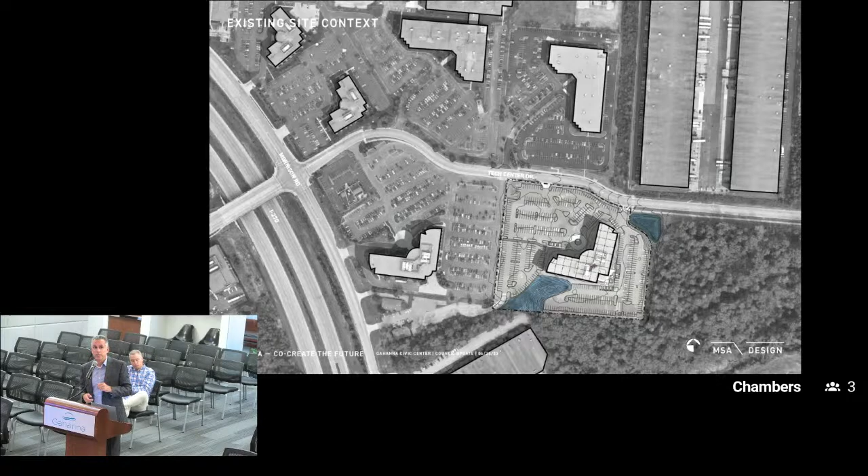So as we started looking at a new site plan, we began with the building and getting back to this rebranding idea of a unique identity. From a cost-effective perspective, we saw that if we focused our efforts on the northwest-facing part of the building, that would solve a lot of issues we saw with the existing building at the time.

All the light gray areas you'll see on the floor plans are the additions to the building. The unique circumstance is they all required a higher ceiling level, a higher floor-to-floor than the existing building provided. The existing building has 14-foot floor-to-floor plates throughout. So to put a council chambers in a 14-foot floor-to-floor, we'd get close to a 9-foot ceiling, and that's not an appropriate environment for council chambers.

Same with the Sally Port—it requires a high bay space for storage and taller vehicles. The Sally Port is where police officers bring their cars in and unload prisoners.

The two existing curb cuts remain, and we added another one here. Secured parking for police is on this side, which primarily occupies this side of the building. This was intentional, so if they got a call, they could run out, get in their vehicles, and shoot straight out to the street—just to make things easy on them from a timing perspective.

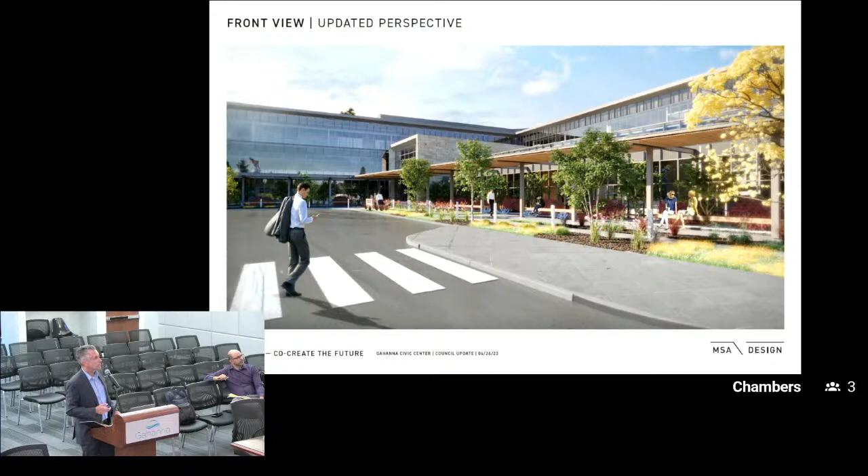And then just another perspective looking from another direction. As I mentioned, over here is the entrance to the senior center. And then we do have this canopy that sort of runs all the way through, and then that's the main entrance. And that's it.

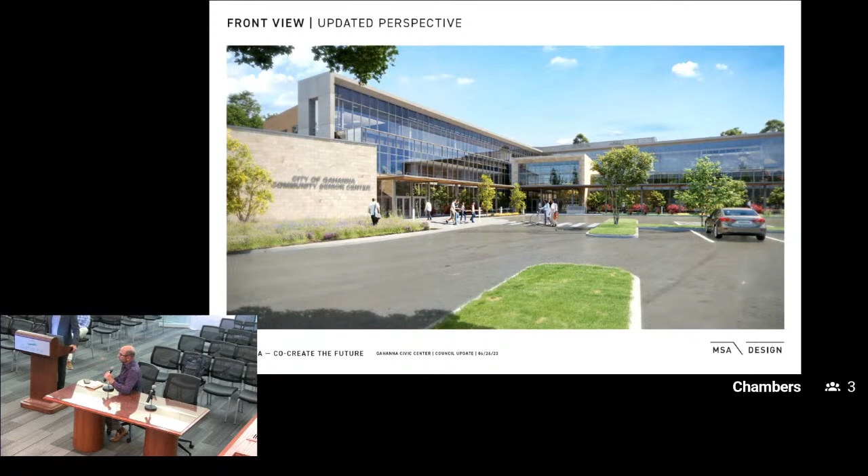It was very important to us. We had the conversation following the brownfield discussion that was had in these chambers just a few months ago, or I guess a year ago at this point. But this is the people's building, this is City Hall, so it's important for us to have the public discussion and have your input on this. As I started with, you're the experts, you hear this all the time, and we want to hear your input and create the opportunity for the public to be part of the process.

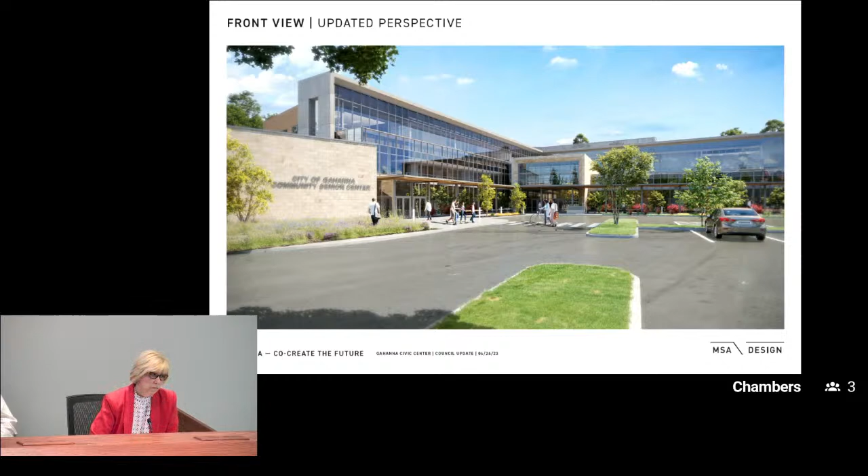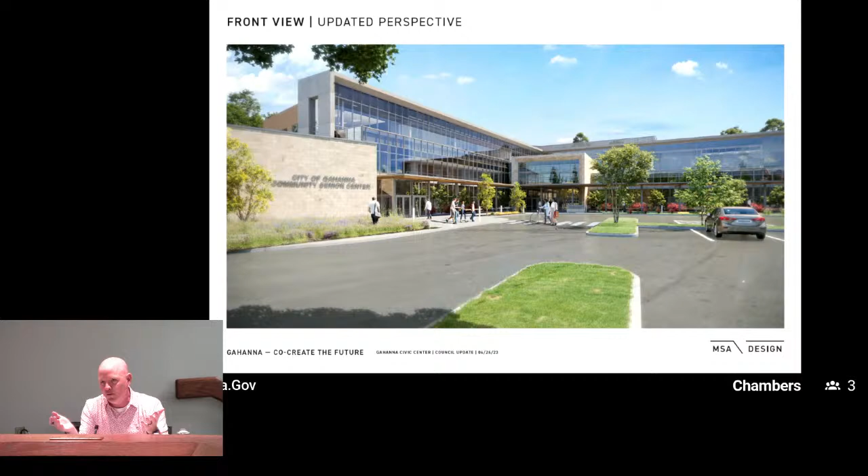Any ideas at this point on variances? I think the one that jumps out is probably parking. I don't think you'll have any pushback — the commission's been very open to that argument for commercial buildings. The reason I ask is just so you can gauge the temperature of the planning commission, and we're not surprised if you come with 20 variances with the application. To speak on their behalf, they've been very open that you guys are going to be engaged in this process along the way. It's always been on the table. That's why I was like, well, what are you talking about?

I didn't know about the brownfield thing. It's always been presented to me that this is part of the approval process and getting through the city. And that's refreshing, like the mayor said, to have public input and to go through the steps that all other developments do. Our firm in general takes on an attitude that this is the community's building — we're here to help execute it. That's always been entrenched in the values of our firm, so just so you know that. And I think the process speaks to that too. Thank you. Thank you.

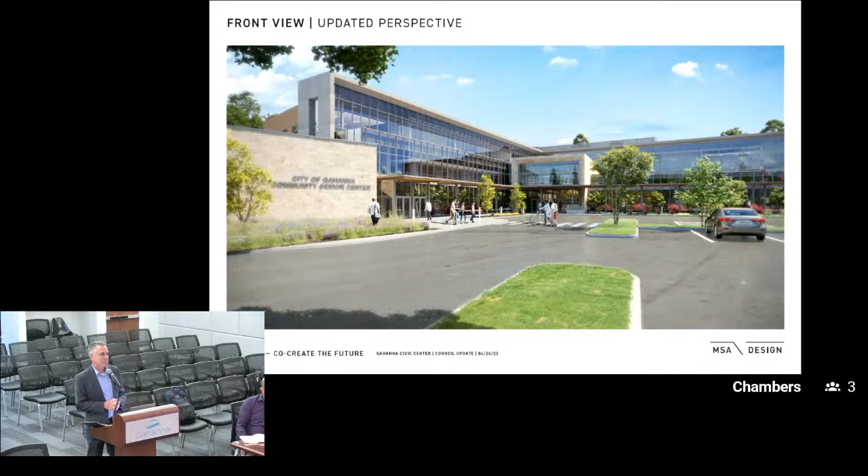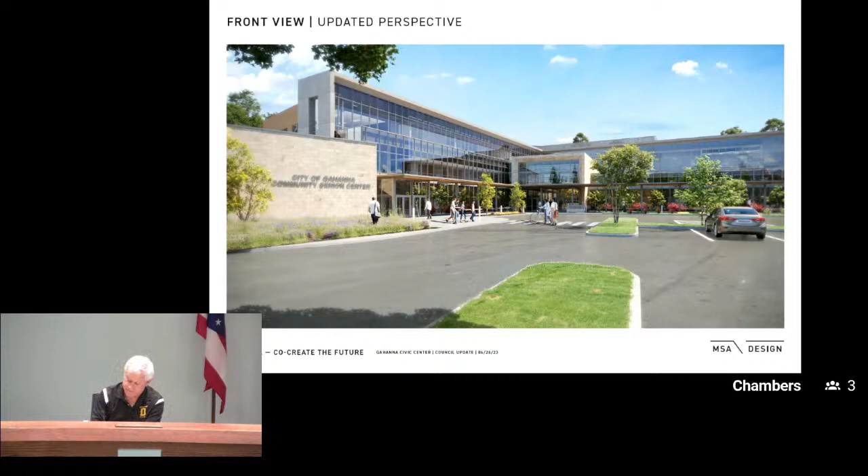Any other questions from the commission? Mr. Markin? So I just pulled up Google Earth real quick — one of the things that seems to come up all the time is sidewalks. It looks like there's a sidewalk and a walking path on the east side of the street, it comes up the west side, and right before your building there's a crossover to Cross Tech Center, then it crosses to the other side.

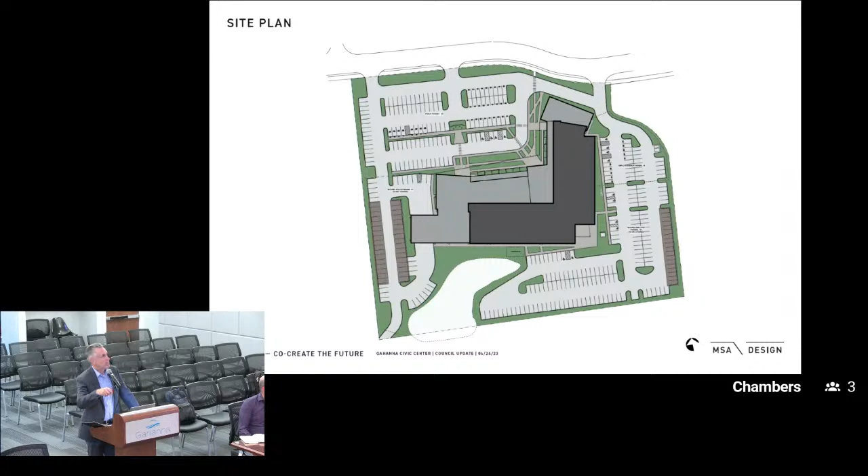I don't know if this is for Michael — we noticed that right away. And I didn't point it out when I walked through here, but if there's a bike path coming down, you've got to go across the street, it goes around, then comes around like this. We think that was originally done that way because there's a bus stop on the other side of the street. But one of the things we worked with the city on very early was, that's fine, leave it crossing, but we need to figure out a way to get this bike path continuous through here, because this building is a hub for the community.

It can be a trailhead basically for that bike path. So we envision 5K races that might be organized — you use the lobby as where you come in and sign up, maybe open up the bathrooms for the runners to use, and everything comes out of there. So that was a critical piece we worked in right away, was to pull that bike path over to the other side, which will be twofold — used as a sidewalk, a walking path, as well as the paved trail. I think, agreeing with you, that's important — it's something we try not to bend on, getting sidewalks and bike paths wherever we can have them. I'm a cyclist, and bike paths are important.

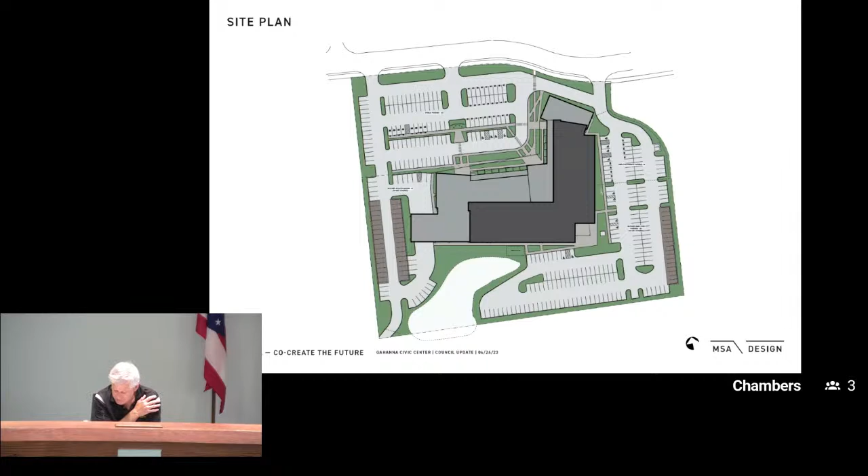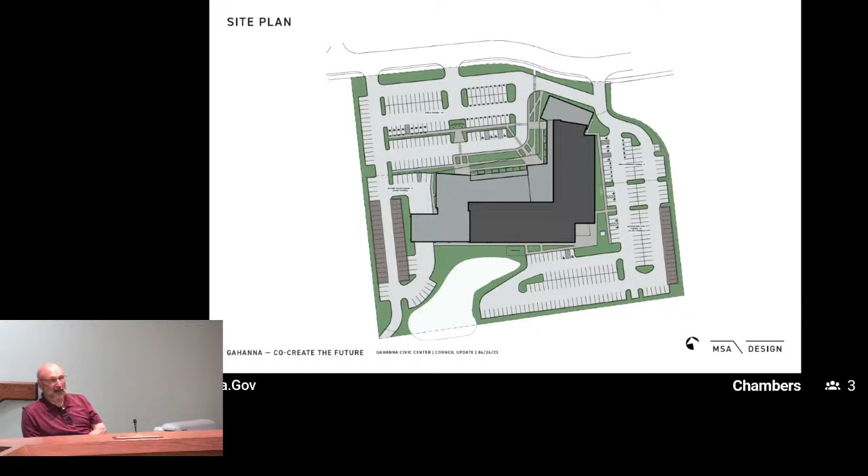That's all I got, Mr. Mako. Mr. Greenberg? I'm just curious, and I've had some discussions about environmental aspects to the property. Has anything been looked at or finalized as far as that goes?

Environmental, such as how the building operates, or sustainability, you mean? I think of environmental, I think of asbestos, so that's why I ask. No asbestos? Yes, that's a conversation that comes up continuously throughout the process.

We are in an existing building with limited funds, but we are doing best practice where it makes sense. You heard me mention the idea of solar arrays on top of the covered parking. We will have EV charging stations out in the front parking lot, and the roof of the existing building will be structurally upgraded, because it has to be already since this is an essential facility from a design perspective.

It will be upgraded to the point that it can handle the additional load of any future solar arrays, and we'll put conduits in from wherever they need to go to get to the roof. So we are equipping, where it makes sense, bringing that into play. And all our mechanical systems going into the building will be high efficiency, for the best use for the building too.

As part of the process, the question came up the other night about daylighting and the use of daylighting. On the front of the building, there's a lot of light that spills into that area. That lobby during the day is probably not going to need a lot of light itself—it's going to be lit primarily through daylighting.

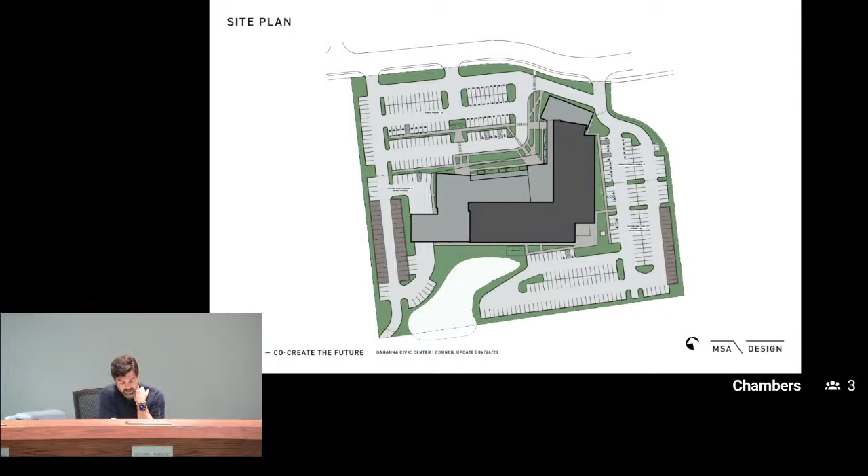The amount of glass - without seeing the renderings for the first time, it's hard to gauge what's in plane, what's out of plane, and things like that. But I think the amount of glazing on that north side is actually going to be really beneficial, especially for the public spaces. Being more north facing, it should be pretty diffuse for the most part, and I think that's good too.

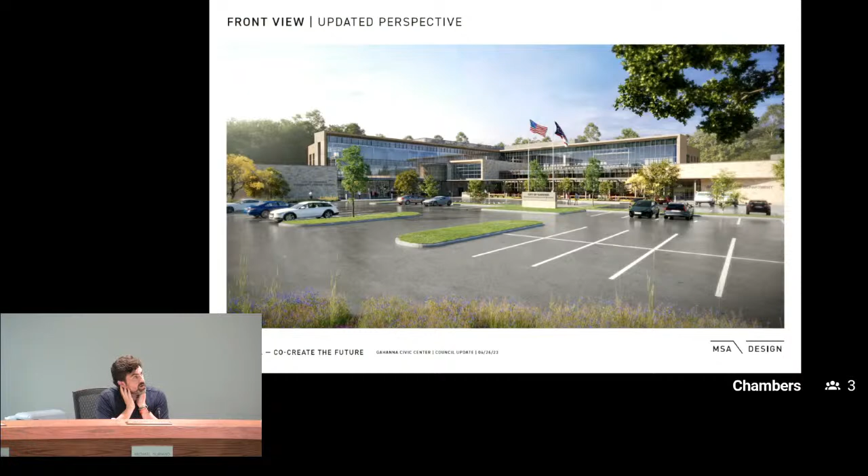I did have one question with regard to daylighting, and that is, because a lot of the staff spaces and a lot of the interior spaces towards, I guess, the south and the east - I'm not sure what the windows look like on the back of that building - but when I look at this building and go upstairs or on the first floor, one thing I'm critical of as an architect is that this feels like a really hermetically sealed box in terms of natural light, like what we see in workplace design, where it just feels really dark. So is there opportunity for, whether it's borrowed light or direct glazing, on the south and east?

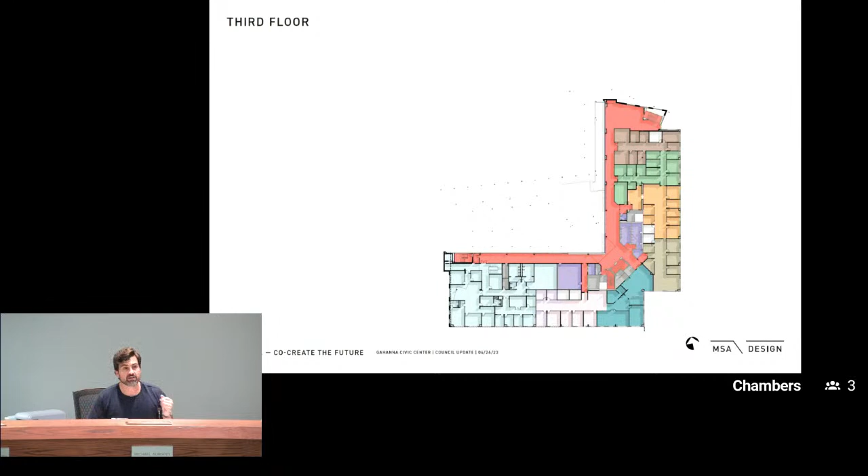What we really focused on, as you picked up on, for all intents and purposes - I'm on the third floor because this is the best one to explain with - this whole wall has been transformed into complete curtain wall, so it's all glass. So this whole red area will take on a lot of natural light. As you get into these office spaces at the entryways, those will not be solid doors - those will be glass doors with glass side lights, even on the outside walls where we have offices all lined up, so light will come in from the windows we currently have and spill into these centralized areas. Is it where we would like it to be? Probably not, but we are also dealing with existing construction and limitations with budget. So the idea is really focusing our efforts on this front facade and putting everything into that, and essentially not touching the back of the building.

We're going to recap the parking lot. We'll redo some landscaping back there, but it's really some nip and tuck, just kind of spruce it up a little bit. That's just where we are. We can't just drop the entire facade and put a whole new facade on the building.

Sure, no, I definitely understand. I just didn't know what types of windows we had on the backside. They're like punched openings, probably at least 5 foot by 5 foot. So there's some pretty decent light that comes in there. But how does that really transfer itself from here and get into here?

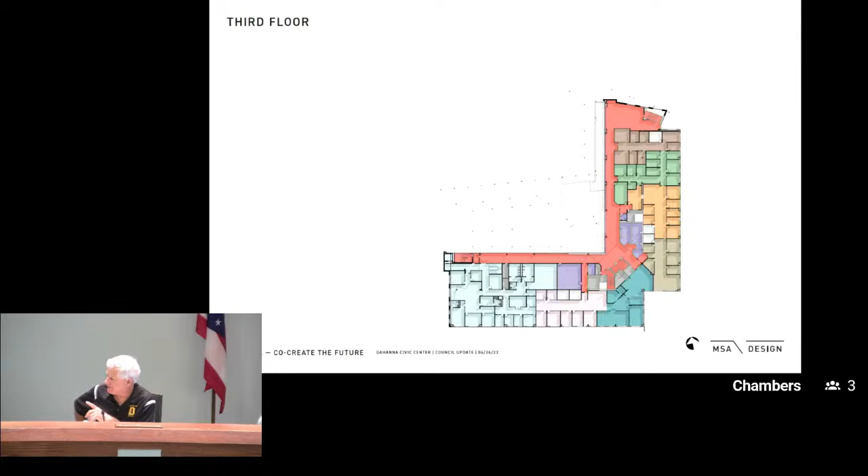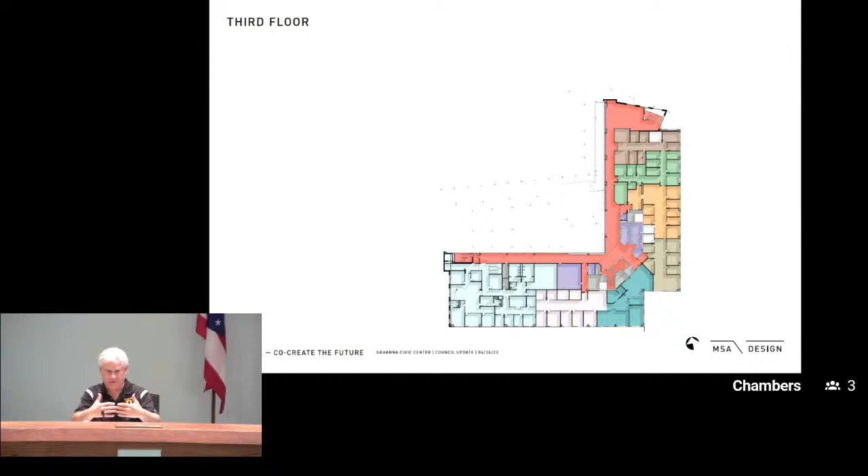Got it. Okay, can I ask you a quick question on that, since I'm not an architect? On the front side, are you taking the front wall off pretty much, to open it up to the light? Yeah, pretty much. So the back stays the same, but the front, what we see as the front of the building now, gets removed and opened?

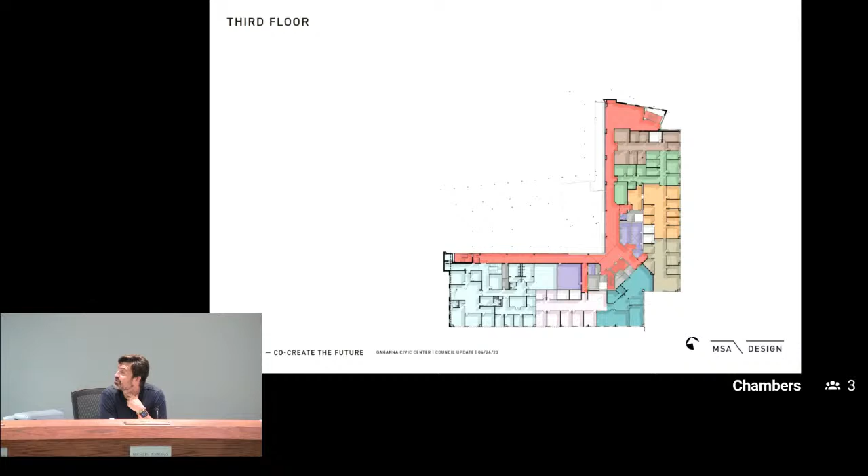Yes, pretty much. And I would expect too on that curtain wall - I know renderings aren't always truthful, but typically when you see large expanses of glazed wall on office parks, if you drive on 270 or wherever, they tend to have spandrel panels in them, super reflective and kind of 90s looking. So I'd expect that whatever we choose from the curtain wall side, that glazing is going to have a huge amount of reflectivity. There's probably a low-E coating or something like that. Okay.

So one of the things here, and I didn't do a very good job explaining this earlier - on the second floor, you're standing here and looking down into the lobby. So essentially when you're standing at this edge, you're looking out that window, looking direct north. And then even this walkway here that comes along the curtain wall, the glass wall is out on that edge, right there - you see that line? You might see a small gap in there. There's a slot that runs all the way down the side, so this walkway is almost floating through there. That's intentional, bringing in the natural light, bringing the inside in, the outside in.

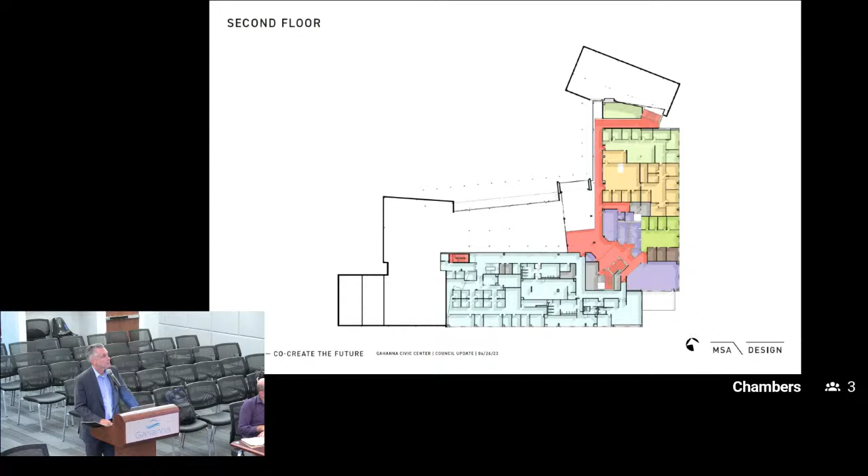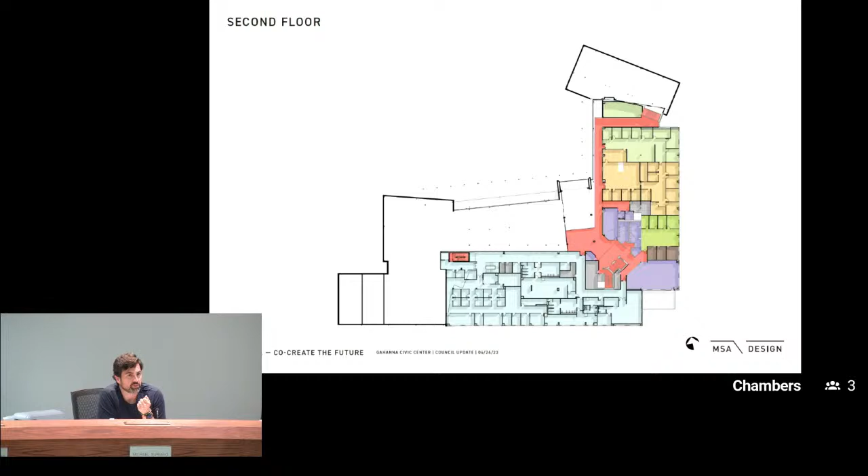One thought I had, looking at this side, I guess the front side of the building - so we have three major entities in the project, right? We have police, we have public city staff, and we have the senior center. I think one thing to be conscientious of is what identity looks like for each of those three entries. So for someone coming to the building for the first time, how do they know where to go? It's not to say we need giant different signage for each of those pieces, but at least to have some linkage to the form making, to the wayfinding, et cetera.

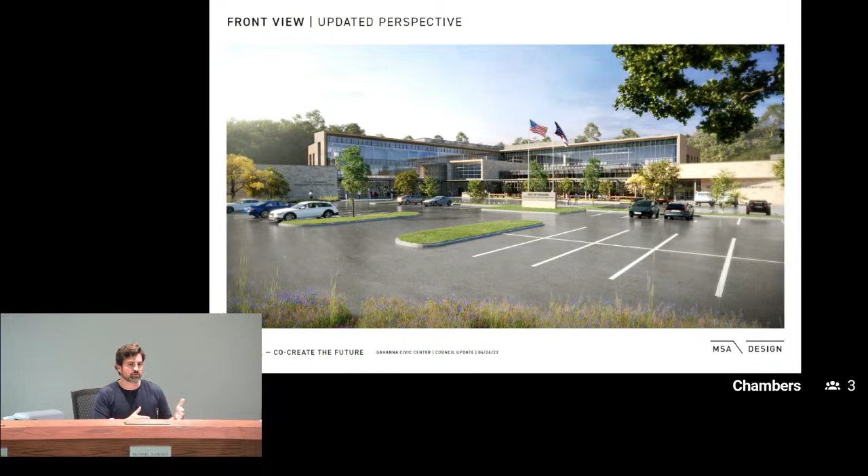Yeah, so you can start to see it in the rendering here, it's a little washed out. This says senior center on it - there is a sign that would be on that wall. We'd have the same element over here with police. We really haven't come up with anything for the third yet, we've been talking about it but haven't solved it. I think this would be like City of Gahanna, so it would be highlighted with signage. And as you come into the site, there's a major sign piece right here with the flagpoles and so forth too. Great.

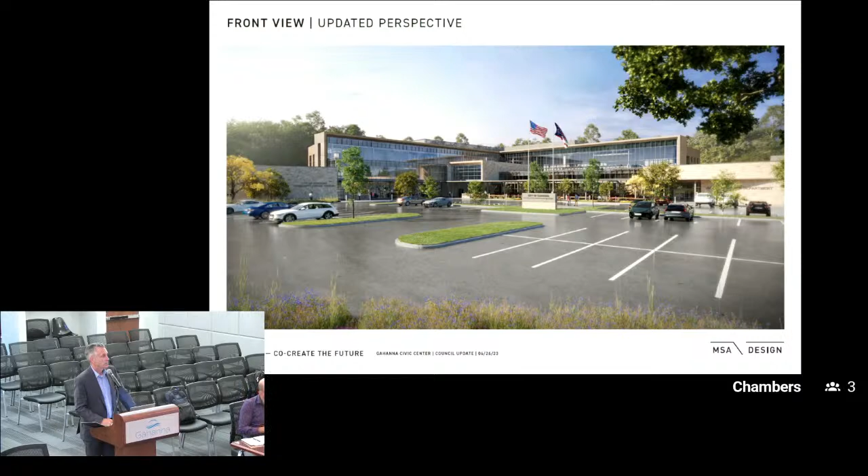I had one other comment - could you go back to the first floor? So I think one hurdle that at least visually we may have to get over - I'm looking at council chambers and proximity to entry. I'm sure you all talked a lot about it through programming and stacking, and there's a reason it's on the first floor, obviously. So floor to floor in that location, is it a story and a half? It's a story and a half. Okay, so this is pretty much a two-story volume in here. Yeah, so this would be a large volume space, not too unlike what you see here.

And then even along the back of it, we have almost a clerestory framed into the building right here that will allow natural light to come into the council chambers itself.

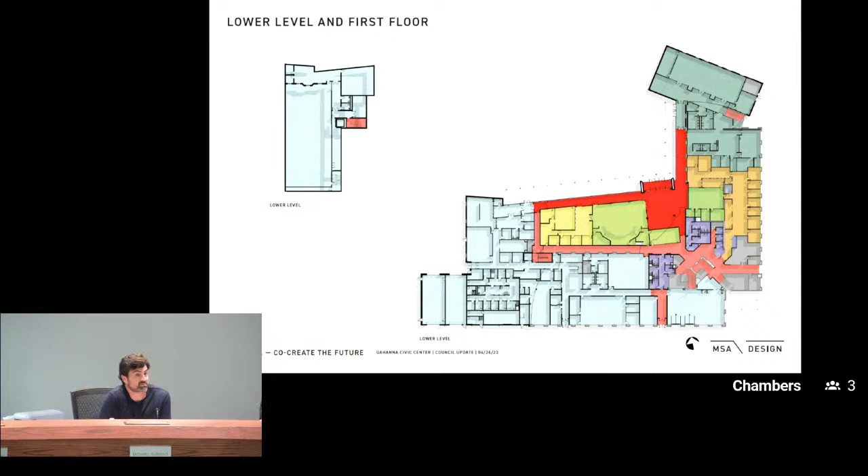In terms of visibility, the reality is it's a security issue if you're bringing the public deeper into the building, and there's no checkpoint up front. So you really want to keep that activity up front. It's easier for people in charge of security to monitor what's going on.

And from a public perspective, outside of that dark red, and even in the green and yellow, the public can't get beyond that perimeter, with the exception of maybe walking down into the senior center. But they can't get in here to the elevator core, and they can't get back into where the detention center is for the prisoners with police and so forth. So this was very intentional, to pull council chambers up and have it off the lobby.

When they come in the building, they're only in a little part of the building. Yeah, makes a lot of sense in terms of it being monitored and controlled. And Chief Spence has been with us each and every step, making sure that from the police department's perspective, if there was an event or incident inside of that room, inside Mayor's Court, inside the main lobby, that they have proper sight lines and those types of things to neutralize whatever might be coming in.

We did flirt a little bit with the orientation of council chambers. Council chambers actually faces north. Council had a lot of discussions about potentially rotating it 90 degrees, so it was more open to the main lobby. But then that limited the security, where you'd now have two doors.

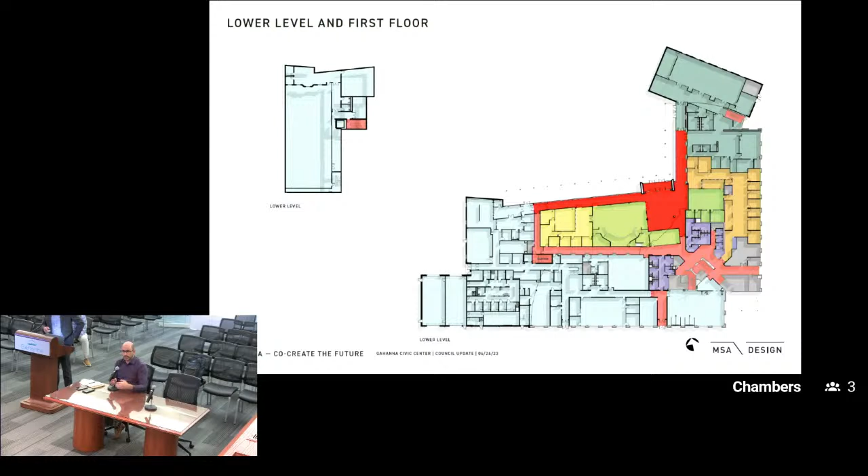And is that wall on the north side of chambers and east, is that glazed? It has some glazing in it, yes. Okay. And we have some glazing here too. Now, that was part of a security feature as well. We had a lot of discussions—do we do a fishbowl so everybody can see in there, or what? We didn't want the fishbowl, but we wanted to have sight lines into it. So we did, I'd call it, 50% glass, 50% wall.

Okay. Yeah, like I said, it was definitely, in terms of the overall aesthetic of the building, unexpected—pleasantly, I think—in terms of transformation.

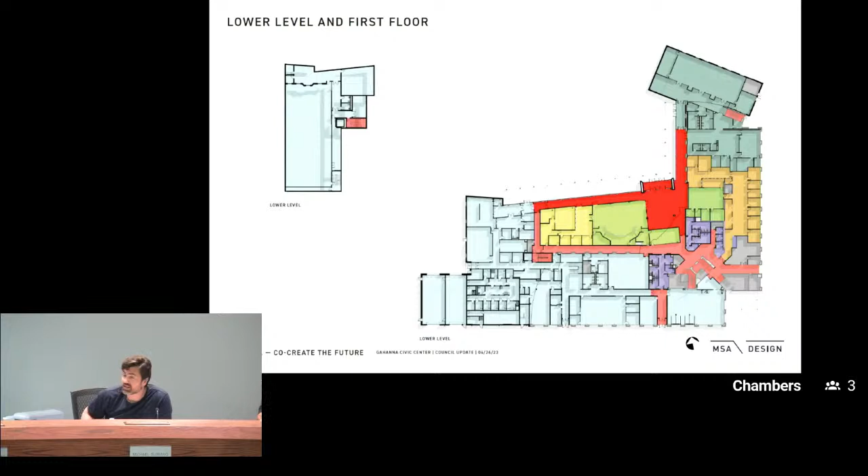I would say, like, your note around civic presence and materiality—it looks like we're leveraging two major materials. Is it stone or glass? I would say we can get a lot out of masonry too. Part of that was that we have this existing brick that we have to work with, it's there. We can't just shut it off, and you don't want to paint it, because then that's a maintenance issue long-term.

To bring another brick into the building, we had internal discussions about that, and that really wasn't going anywhere with us. And we do a lot of government facilities, and stone is a very big part of that—a lot of, fortunately and unfortunately, base, middle, top type of approach. We try to contemporize that where we possibly can.

We had an opportunity here with sort of doing the bookends with the stone, and then allowing that middle area to be a lot of glass, a lot of curtain wall, really sending this message of transparency. And felt like that was a strong message to send with the design. And as you noted, it is a complete transformation of what's there—there's not another building in that area that even looks like this.

As residents come to the building, as other users may come to the building, it's going to have its own unique identity, and hopefully, as I keep saying, serve as that hub for the city of Gahanna and for the community.

Okay, thanks, I think those are my questions. I have a few questions, nothing earth-shattering.

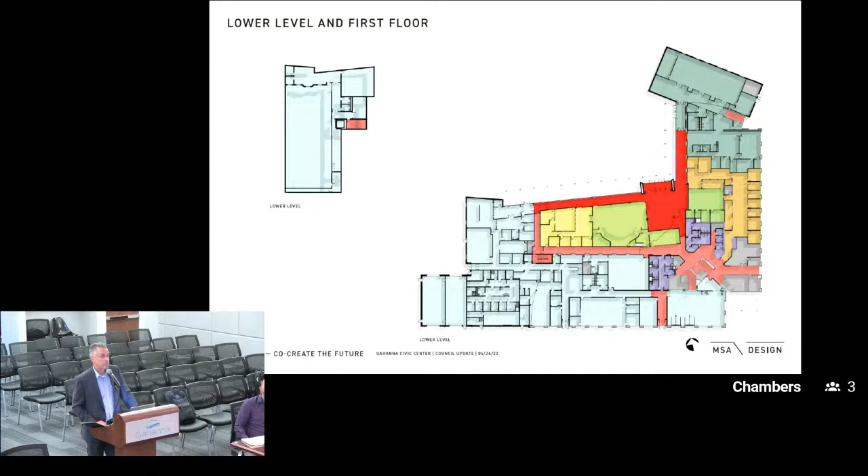Currently. Okay, and did I see on the site plan there's going to be 3 points of access from Tech Center Drive? Yes, is that correct? You did. Okay, and we talked a little bit about parking.

What's the net loss gain with what it is today and what you're proposing? So I don't have those exact, I can tell you what's there now in this plan. Ballpark? Yeah. What's there now in the plan is the police secured parking down in the lower left-hand corner has 61 total, and 34 of those are covered. The administration secured parking, over to the right of the plan, has 156 total, with 18 covered. And then above that, another part of that lot has 34 spaces. And then the public parking is 123 total. That gives you a total of 374 spaces across the entire lot.

I think the existing lot was pushing about 400, maybe a little over 400. It was closer to, I think it was actually about 475, yeah, so it's about 100 more. Yeah, and it was overparked. That's a lot of parking. There's really no reason to have that much parking there.

And again, so you're comfortable with the amount of parking that's being proposed? You're comfortable with that number? Yeah, and we've gone back and forth with them. If there was a day when council chambers was full with an event and the multi-use room was full with an event at noon, and all the workers were in the building, that could be problematic. And we've talked about that, and said that is probably unlikely anyway. If that became an issue, then they would look at alternative parking plans to support that.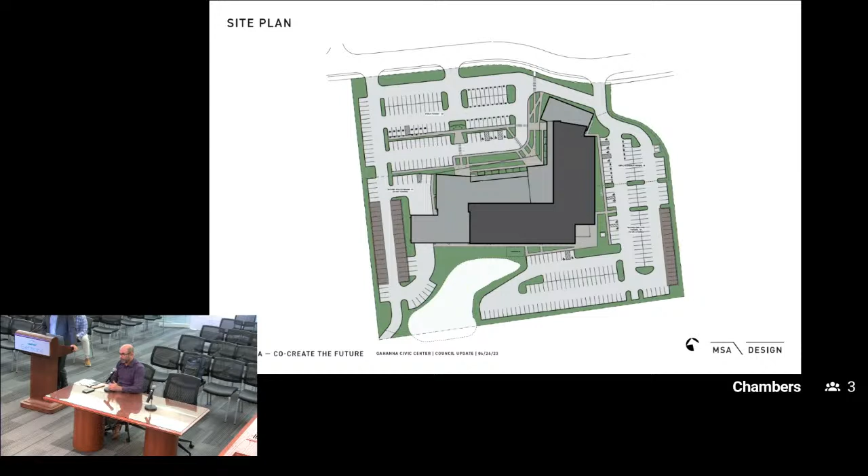Okay, very good. Getting back to another access question: assuming that most of the residents, when they eventually come here, are going to be coming down from Morrison then turn on Tech Center, what type of signage, roadway signage, are you proposing?

So that's something we've had discussions about, what happens up at that intersection. That is a key point, whether it gets addressed through this project or a future project, the city almost sort of needs to own that intersection to some extent. There will be signage out there saying City Hall this way. But I like to think there's probably an elevated approach to whatever that is, whether it's arches or something in the pavement, whatever. The City of Gahanna tends to heighten major intersections or major points with their own unique branding, and I think that's an opportunity up there to do that.

Getting back to the question on sustainability, is this going to be a LEED certified building? It will not be LEED certified, but we will be very close. The beauty of today's environment is that the building code has really caught up to what LEED is all about. To get LEED certified you do have to go to higher standards that aren't in the code, but designing to the building code gets you pretty darn close before you have to start adding bike racks or more efficient systems.

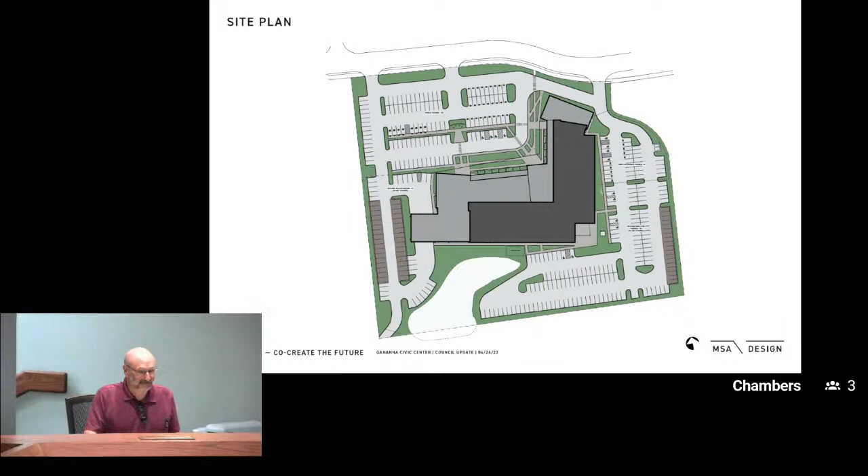Any other questions from the commission? I think it was a great presentation. Thank you, it's good to see. Just on a personal note, I think this is great. In my daily life I work for a municipality, and it's gonna be a lot of jealousy, just put it that way. Yeah, a lot of jealousy. We'll come talk to you.

All right, anything else from anyone? I actually do have a question: what happens to this building? We don't know that yet. We have not had that conversation with council.

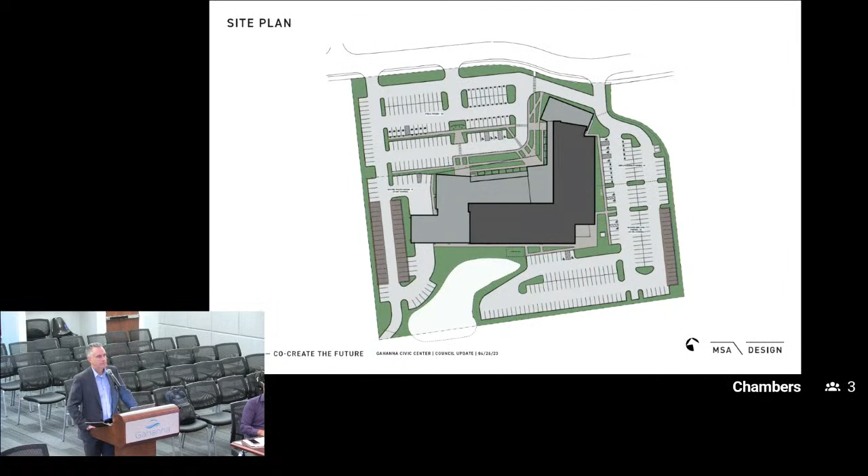There's obviously multiple options we could explore. At one point we had conversations with the school board about temporarily using this, because they will have a gap period from the time they tear down their administration building until their new space is ready. But that would be temporary. There is great interest in developing it as a redevelopment parcel. We've even looked at whether it's a potential site for a community rec center. We don't know if it's big enough for that, but we're trying to evaluate all the potential options it could be. That, again, also needs to be a discussion we have with council.